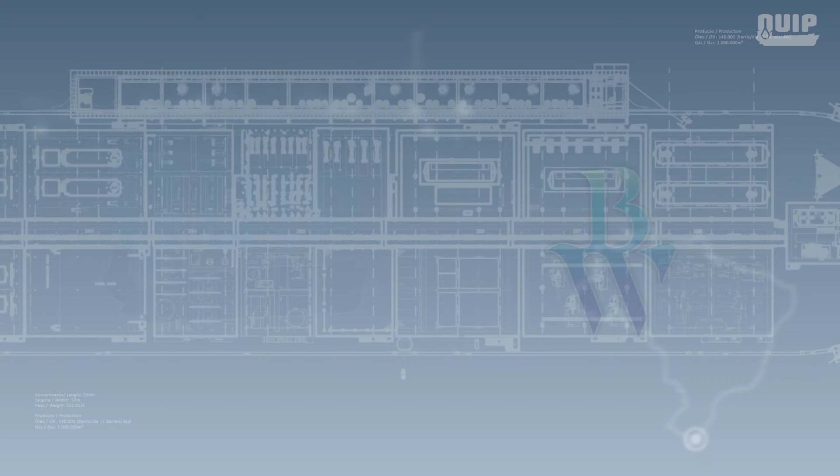With headquarters in the city of Rio Grande, in the state of Rio Grande do Sul, QUIP formed a joint venture with BW Offshore to perform the EPC, engineering, procurement, and construction contract to build the FPSO, Floating Production, Storage, and Offloading Platform P63. We were hired in January 2010 by PNBV, which is a joint venture between Petrobras and Chevron, to build the FPSO P63 with a contractual schedule of 35 months.

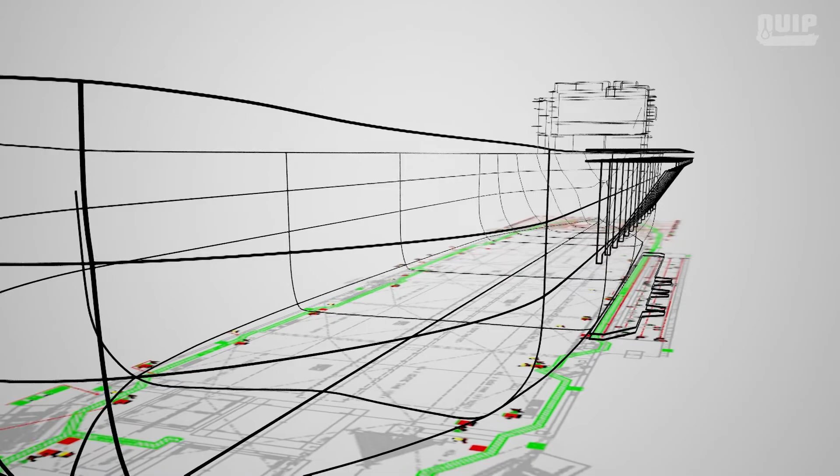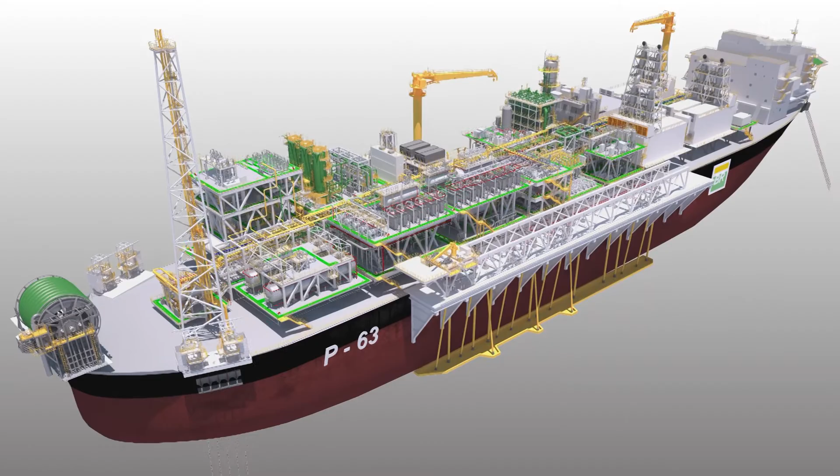This made QUIP the first Brazilian offshore construction company to build an oil platform since the basic design stage through the first 3 years of operation, before final handover to Petrobras. The first 3 years of operation are divided into 2 stages. For the first 18 months, the platform will be operated by BW Offshore and Queiroz Galvão Óleo e Gás, assisted by Petrobras. And for the next period of 18 months, it will be operated by Petrobras with the assistance of BW Offshore and Queiroz Galvão Óleo e Gás.

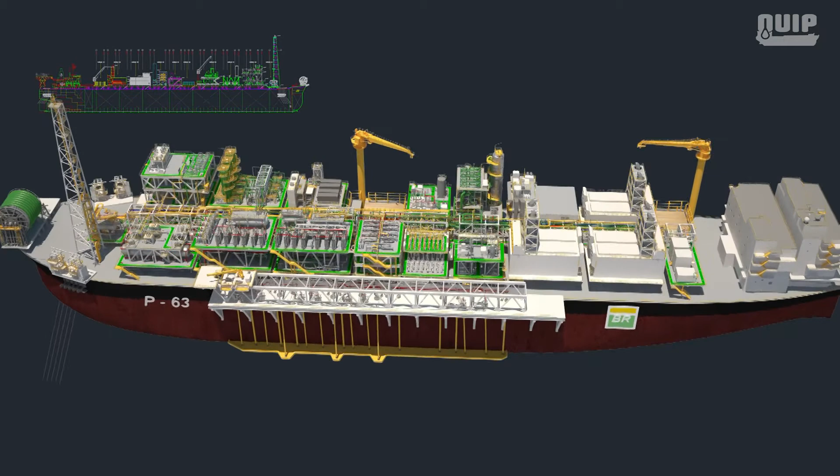QUIP was responsible for the FPSO P63's process basic design that was carried out in record time of only 4 months through a partnership with AMEC Paragon in Houston, in the United States of America. QUIP was also responsible for engineering, procurement, construction, lifting, testing, and final integration of the topsides with the hull. The FPSO P63 commissioning was performed together by QUIP and BW Offshore.

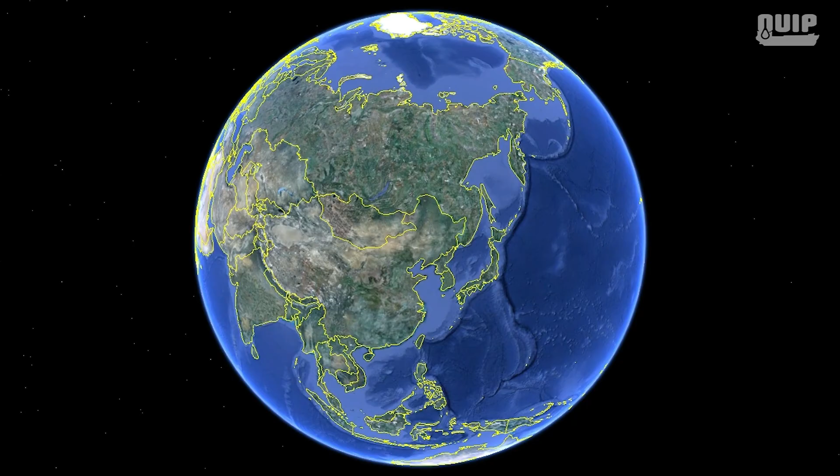The platform is 334 meters long, 57 meters wide, and has a displacement of 322,912 tons. It will produce 140,000 barrels of oil a day and 1 million cubic meters of natural gas. The COSCO shipyard in Dalian, China, converted the hull of the BW Nisa, a VLCC class oil tanker, into the platform FPSO P63.

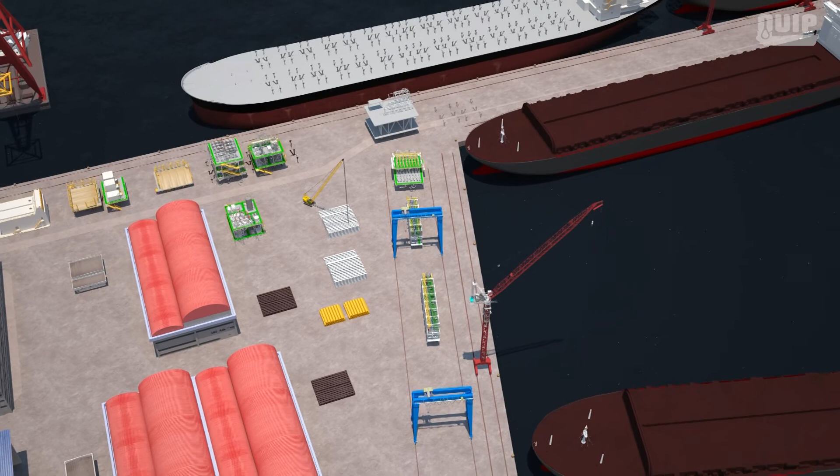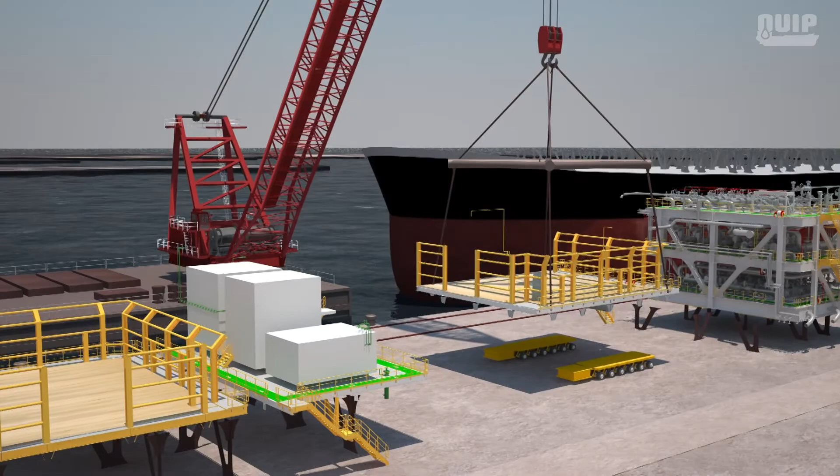The pipe rack and some modules were manufactured in China, using equipment and materials supplied by Brazilian companies. The M31 module was built in Turkey. COSCO used docks 3 and 7 to manufacture, build, and assemble the modules and pipe rack. The 1,000-ton capacity floating crane Yuhang 28 and the 3,000-ton capacity floating crane Yuhang 2 were used to lift and assemble the modules on top of the hull deck and stools. The floating crane Yuhang 28 lifted the laydown modules and the pipe rack.

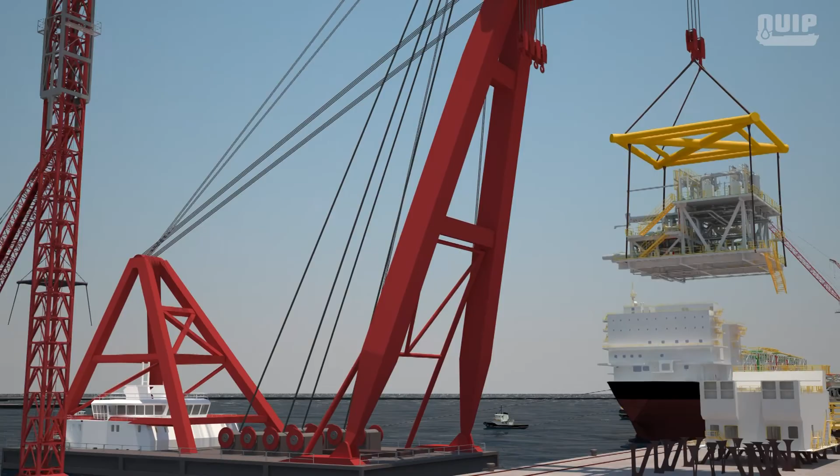P63's hull was turned several times to facilitate modules lifting and placing on the vessel. After hull first turn, floating crane Yuhang 2 lifted M82, the heating-cooling module. Then the vessel was turned again, allowing floating crane Yuhang 28 to lift Z98 pipe rack, and the floating crane Yuhang 2 to lift the generation, electrical, and utilities modules.

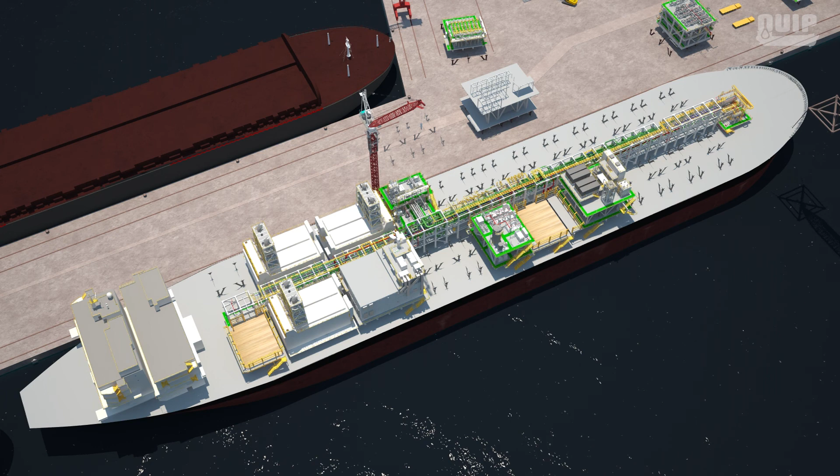After the installation of the modules and the crane pedestals, P63 left the COSCO shipyard and sailed to QUIP facilities in Rio Grande, in the state of Rio Grande do Sul, Brazil. The P63 voyage of 23,000 kilometers from Dalian to Rio Grande took 71 days, including an 8-day stopover in Singapore.

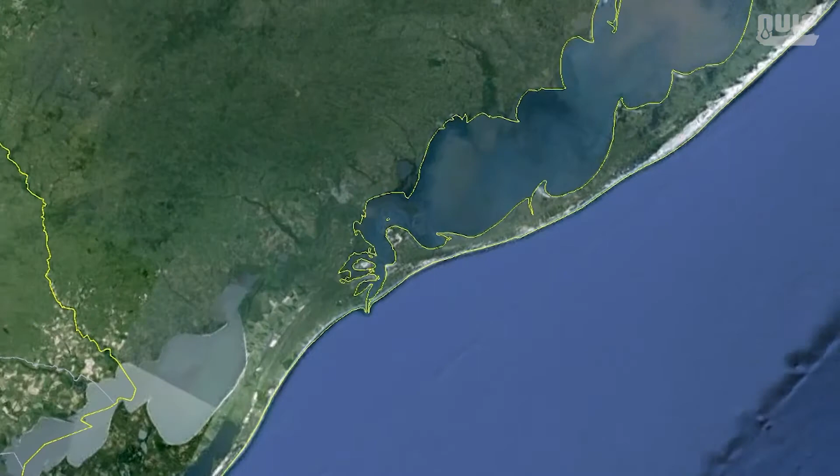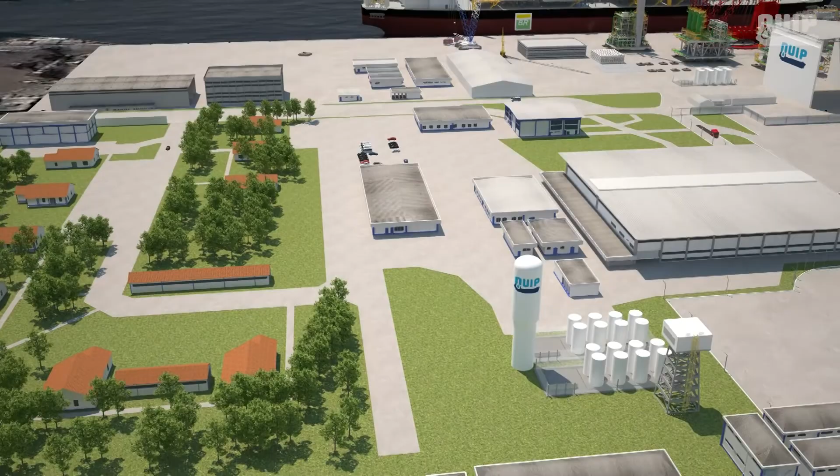QUIP built a special dock at the Rio Grande facilities with capacity to hold both the P63 and another similar-sized platform for which we were responsible at the same time. The construction, assembly, and lifting of the modules built in Brazil, followed by integration and commissioning, were done at these docks. The administrative, industrial, and assembly areas are in Rio Grande. We built industrial sheds over the modules assembly area to ensure we could meet the production schedule regardless of weather conditions.

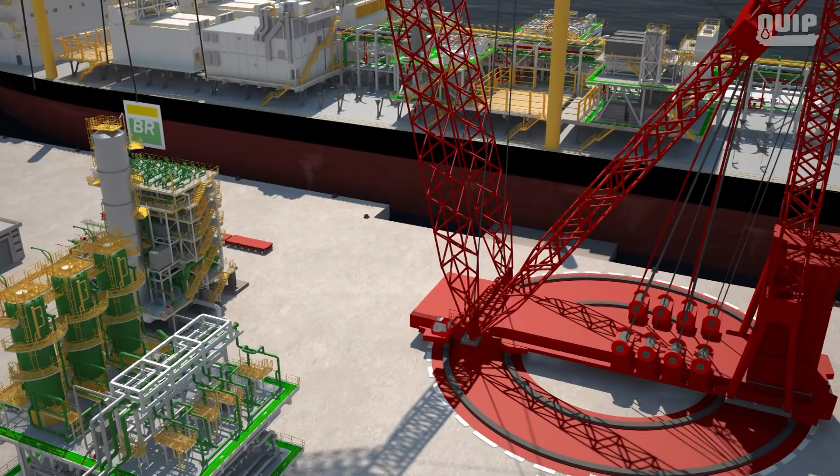Once again, QUIP created a competitive advantage in the naval offshore construction industry in Brazil by using the Mammoet PTC 160DS crane with 4,000-ton capacity to install the modules. We also used 2 Mammoet trailers with 700-ton capacity and a 500-ton Terex CC 2500 crawler crane.

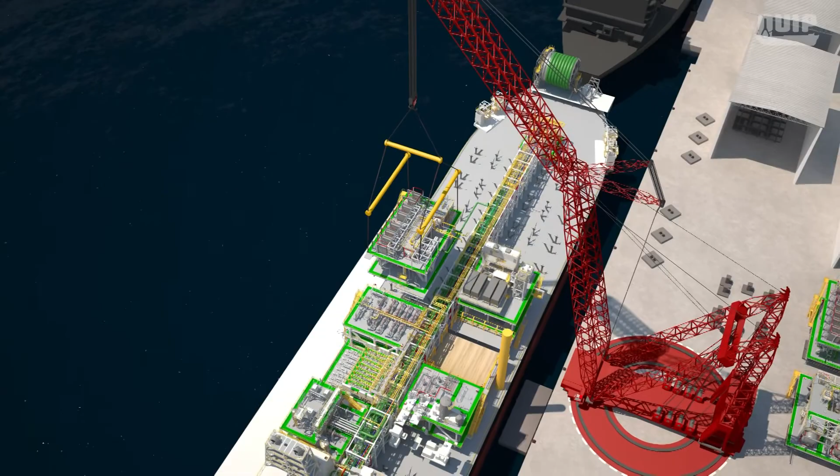With the P63 securely moored, the PTC 160DS crane performed the complex operation of lifting and assembling the high and low pressure oil separator modules, M11 and M12, the electrostatic treatment module, M13, the sulfate removal module, M52, the water treatment and water injection module, M51, and the gas compression and treatment module, M60. Finally, the PTC 160DS crane lifted and installed the flare tower F30.

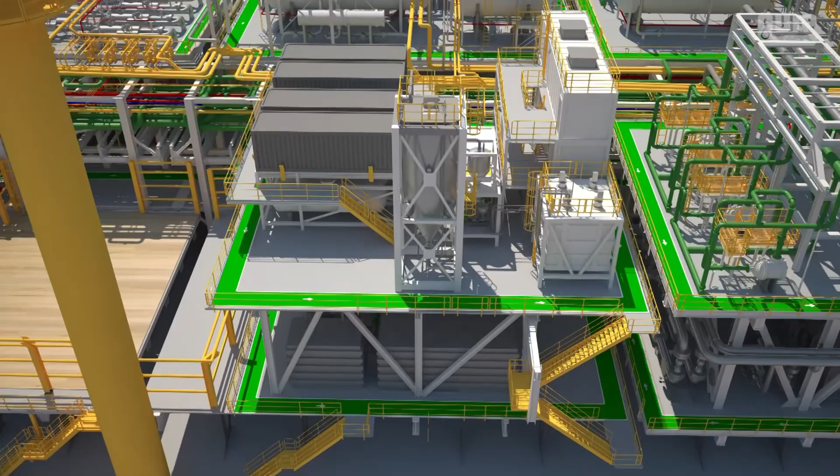The P63 was then repositioned at the dock, changing position with P58 in order to finalize integration, testing, and commissioning. An extension system was developed and installed to avoid P63's lower riser balcony hitting the pier. P63 has the first polymer plant installed on an oil platform in Brazil. The purpose of this plant on Module 83 is to produce a polymer solution to be injected into the water injection wells to increase viscosity and improve the efficiency of oil recovery from the wells.

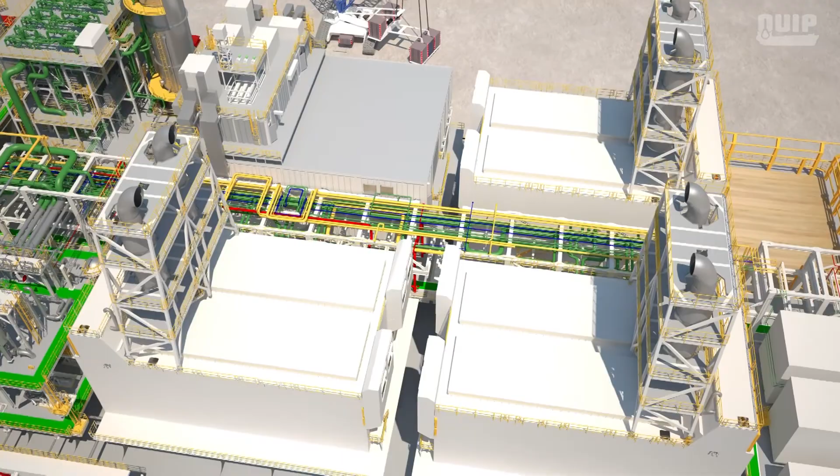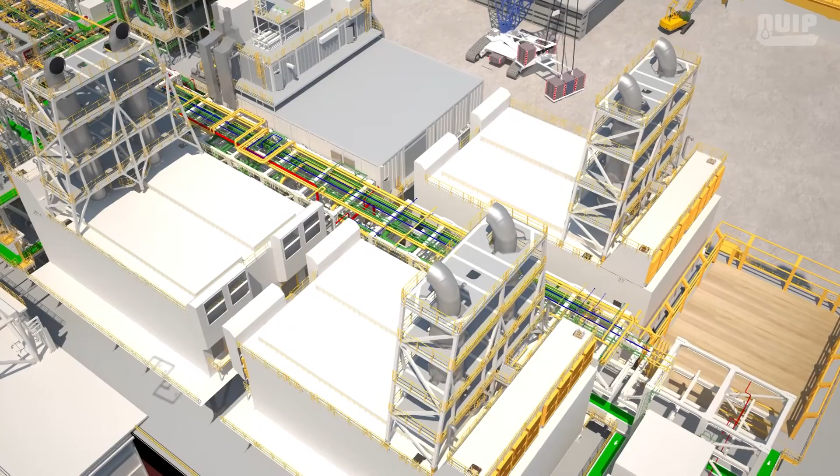The 3 power generation modules with 6 engine-driven generators are also the first in Brazil with technology that allows them to use 3 kinds of fuel: fuel gas, processed crude oil, and diesel oil. They will meet the P63 and P61 oil platforms' energy needs. During the peak construction period, FPSO P63 created 3,000 direct jobs and 3,500 indirect ones. Platform P63 will operate in the Papa-Terra field in the Campos Basin, 110 kilometers from the coast and at a water depth of 1,200 meters.